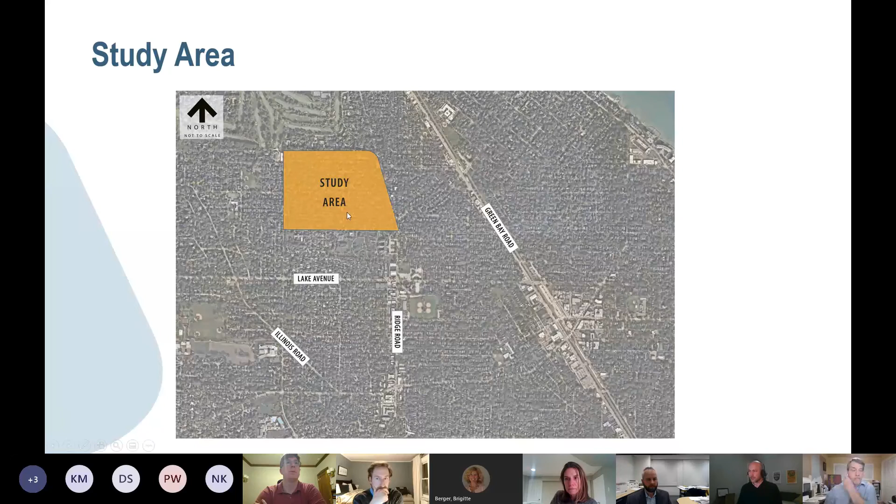Good evening, everyone. So first, the study area. This is kind of the broader look down from the village standpoint. You can see where the study area is, in the general quadrant north of Lake Avenue and west of Ridge. And as we get a little bit closer, the east-west streets highlighted in blue are the street segments that we focused on. Ridge Road on the east, Hunter Avenue on the west, and then Beechwood, Kenilworth, Chestnut, Thornwood, Greenwood, and Elmwood were the 6 streets, with 21st Avenue there in the middle, kind of dividing it in half.

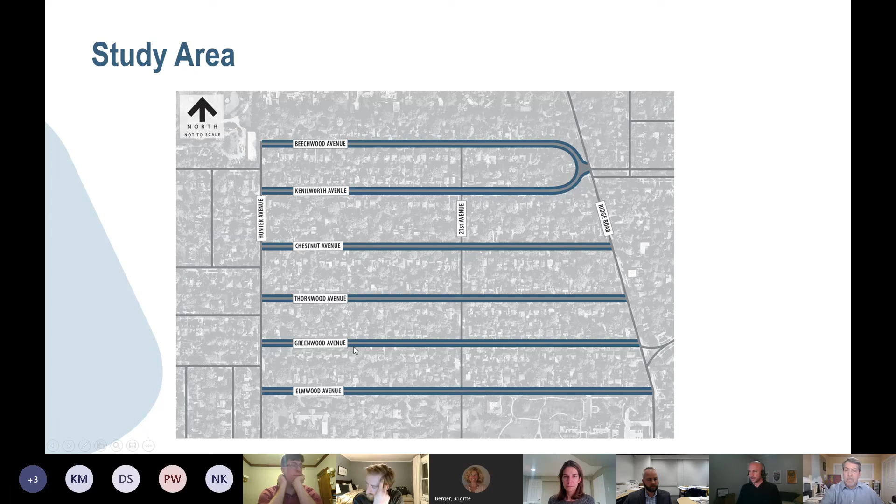So let me first highlight the traffic calming policy of the village. There's 4 criteria, and this is a data-driven criteria established by the village some years ago to put together some thresholds for identifying when streets might be considered for traffic calming mitigation measures. It's not necessarily intended to be: if you meet this criteria, you should have traffic calming. It's sort of an initial screening process. It's not a mandate, similar to a traffic signal or stop sign where you meet certain volume thresholds. You're not necessarily mandated, but at that point you should be starting to consider whether traffic calming measures are appropriate to address issues that may be present.

So the first one is a volume threshold, looking at 1,200 vehicles per day on a local street. The second one looks at the 85th percentile speeds being 7 miles over the posted speed limit. The 85th percentile basically represents a large majority of traffic speeds on the street, not necessarily the occasional person that might drive really fast down the street once in a while, but the large majority of traffic that you typically would see on the street.

Letter C is an excessive accident experience in a pattern that might relate to unreasonable speeds or volumes. And then D is facts or circumstances that may not be captured in these criteria, but might have contributing factors that warrant some consideration by the commission if A, B, and C are not really appropriate or tied to those reasons.

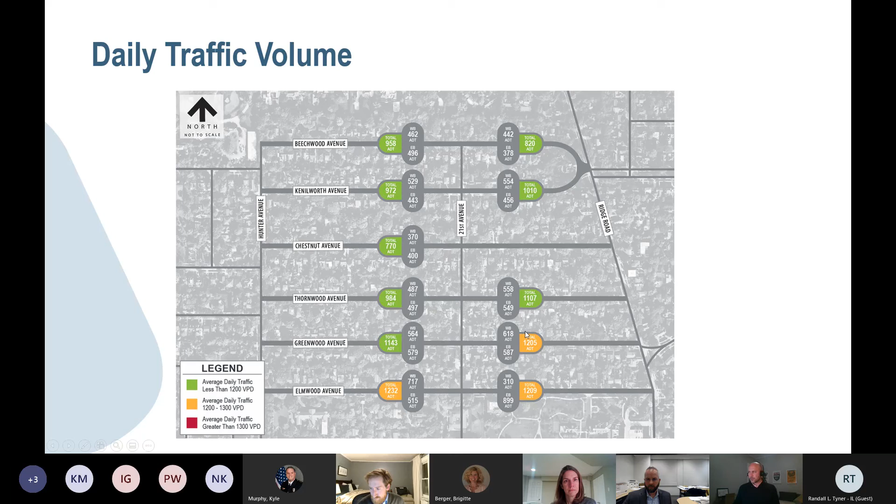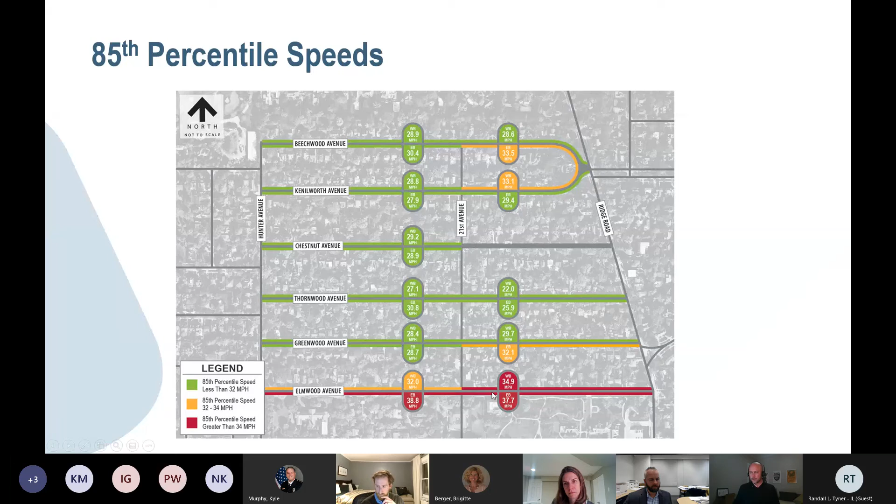So traffic calming measures. So the village also has some criteria for selecting measures, and I've outlined these here. The degree to which the problem is solved, we want to make sure that we're addressing the actual problem at hand, making sure that there's reasonable access for all. So that's making sure that we're still serving emergency vehicles, service vehicles, access to private property and driveways.

The safety implications of the action, making sure that whatever we're doing is still safe and maybe has other safety benefits. And then the last one, which I think is important, is looking at the extent of spillover problems. Basically, we don't want to solve one problem and then create other problems. So we want to make sure that we're thinking about those different characteristics as we're looking at potential measures.

So in terms of the context and the process, this is a general outline of our process and the evaluation. The first was we developed a sort of traffic calming toolbox, a matrix that looks at a range of different options, different scales, different levels of disruption, different levels of cost, and tried to then look at the benefits and the challenges and opportunities associated with each, and then put them in categories as to whether they were appropriate, whether they could be appropriate in certain circumstances, or whether they were just not appropriate for the context of the neighborhood.

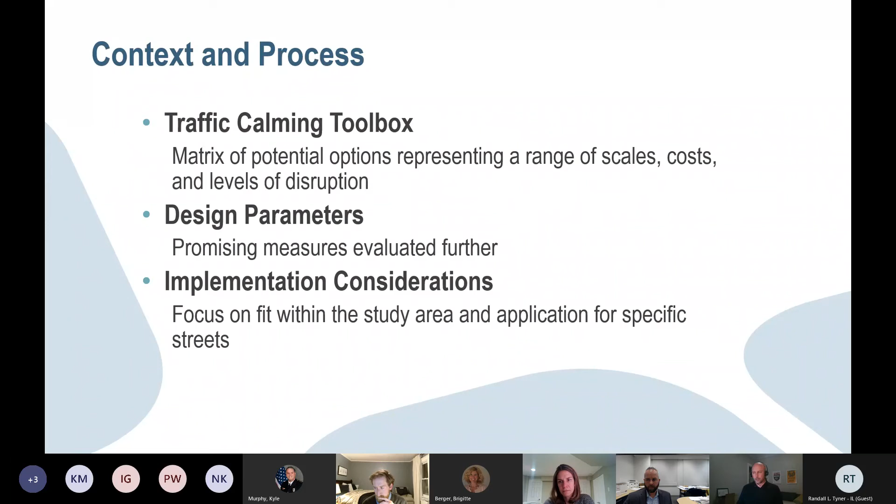And then we worked through those ones that we felt were appropriate or could potentially be appropriate and started to fit them specifically in the neighborhood and understand whether they were solving the problem, whether they were safe, whether they could potentially create other problems, and how disruptive they may or may not be and how effective they may or may not be. So I'm going to walk you through that process.

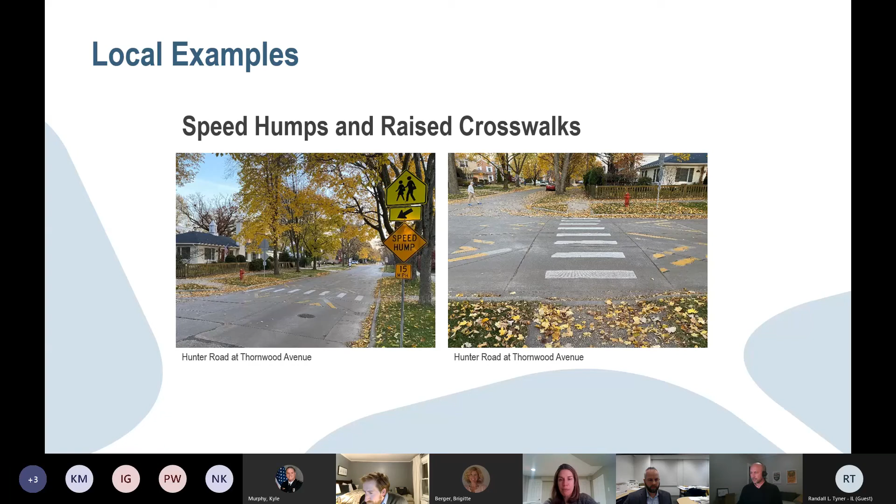But first, I want to show just a couple examples of some traffic calming devices that are in play in Wilmette today. So speed humps and raised crosswalks are a common one. These are some photos of the one at Hunter and Thornwood. It's on, I guess, the south leg of this intersection. It's a raised crosswalk. You can see the ramping up to and from the crosswalk.

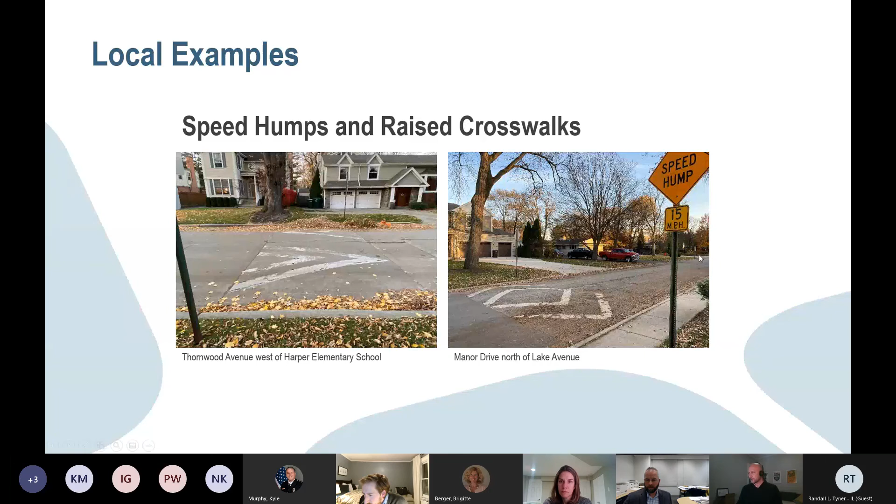The next couple, the one on the left is on Thornwood Avenue. There's I think a pair of them that are just west of Harper Elementary School. This other one on the right is one of 5 along Manor Drive, north of Lake Avenue, a block or two west of Loyola Academy. So there's a series of 5 along Manor Drive.

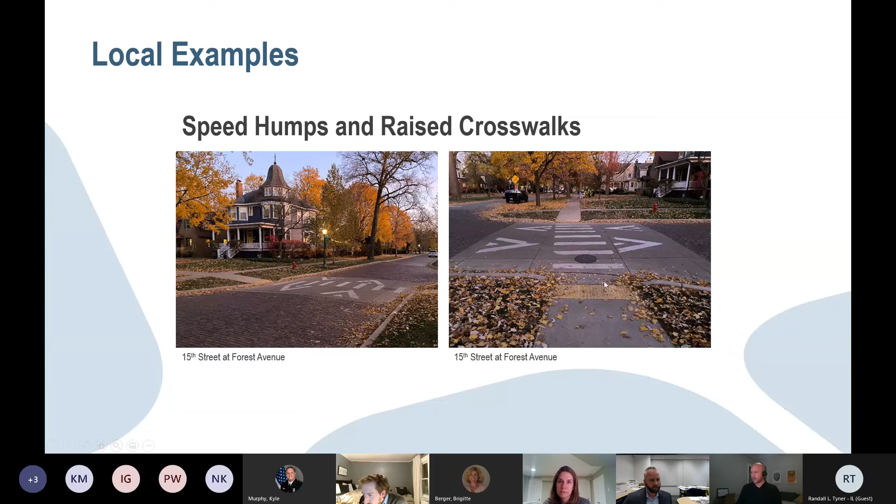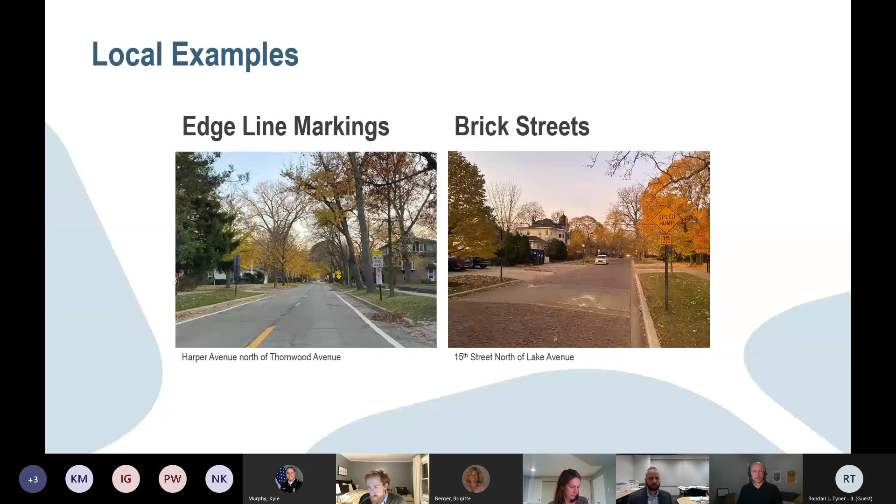And we were evaluating different options. So we looked at things like medians, chicanes, pinch points, and bump outs as being appropriate options. Speed humps, there's precedent in the community, obviously, for that, and they're effective at helping to address speed. Edge lines and other markings could be effective. Vehicle speed feedback signs, it's something that could be effective in some cases.

Bike lanes are something visually that help kind of reduce the effective width of the road and limit the area that vehicle traffic might travel in. Neighborhood traffic circles are another one that could potentially be effective.

Roadway surface treatments, one example would be a brick street that we just talked about, could be appropriate in some locations. And then some of these others are really maybe not appropriate in this location, dealing with some of the radii of the corners, shared streets, woonerfs or shared streets, raised intersections, cul-de-sacs, traffic diverters. Those can be pretty invasive in terms of really limiting access and circulation through a neighborhood.

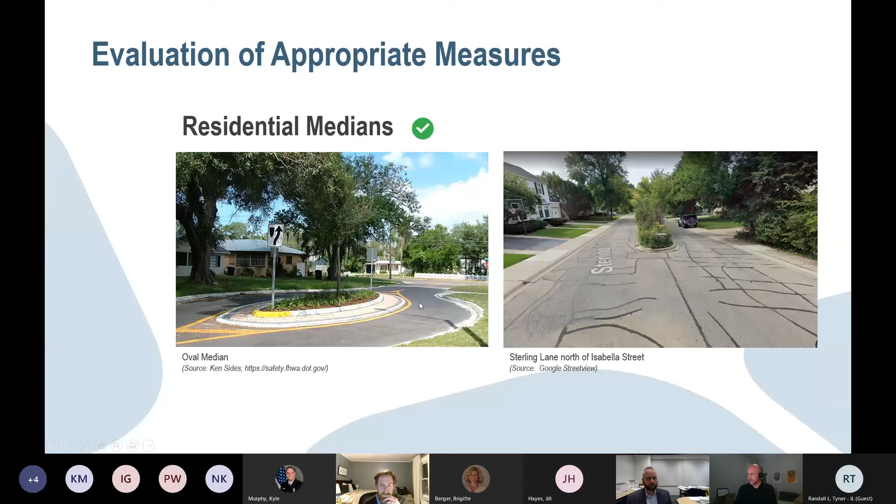The one on the right is actually in Wilmette. This is on Sterling, north of Isabella. So that's just east of Ridge, south of Wilmette Avenue. In that neighborhood, it's just like an L-shaped neighborhood, and you can see the median there kind of divides up the center line of the road.

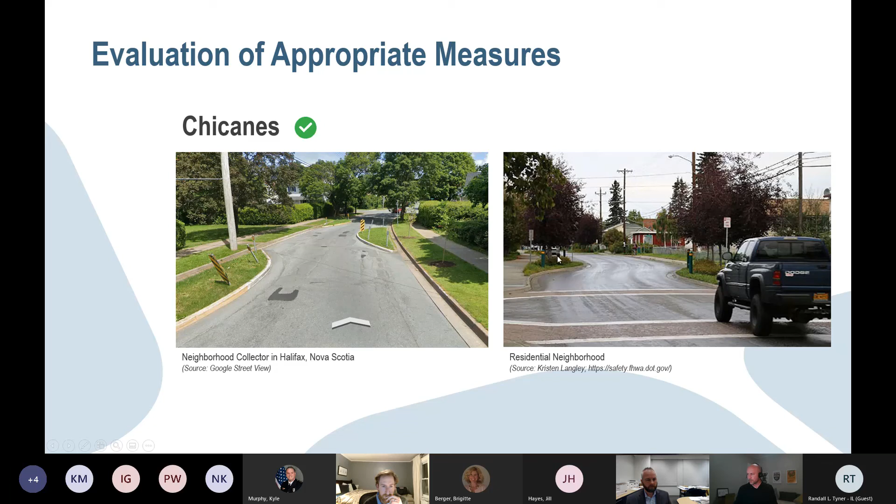Chicanes is another example that helps vehicles kind of have to maneuver around and moderate the speed. So you can see these examples in residential neighborhoods. The one on the left is physically separated from the curb so you can maintain drainage. The one on the right is more kind of built into the curb with the curb and stormwater draining around it. Just a couple ways to handle that.

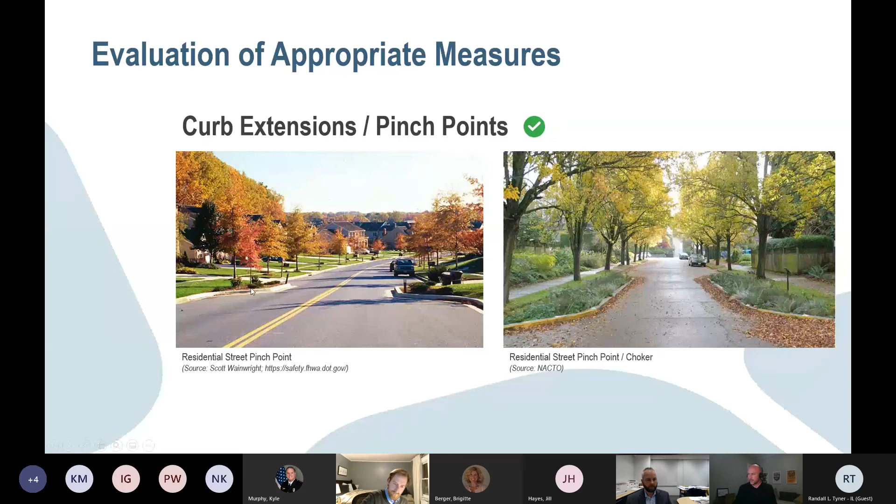Surface treatments have their place in the community. They're a little more passive, but they're also very expensive. And so we didn't feel that was probably the best use to try to pursue on these streets at this time. Vehicle speed feedback signs can be effective in at least informing people when they're driving too fast, which sometimes is the issue. They just maybe aren't aware.

However, in a neighborhood setting, a lot of times this isn't as effective because the drivers are regular drivers that drive the streets every day, and the effectiveness of vehicle speed feedback signs pretty quickly wanes and is no longer effective after a little bit of time.

Traffic circle is a very kind of acute situation, just focused at the intersection. Given the long east to west dimensions, we have, I think, roughly 2,500 feet from east to west between Hunter and Ridge, just a traffic circle would not have enough oomph for the value or bang for the buck at 21st Street to really effectively manage speeds up and down each of the streets that might be appropriate.

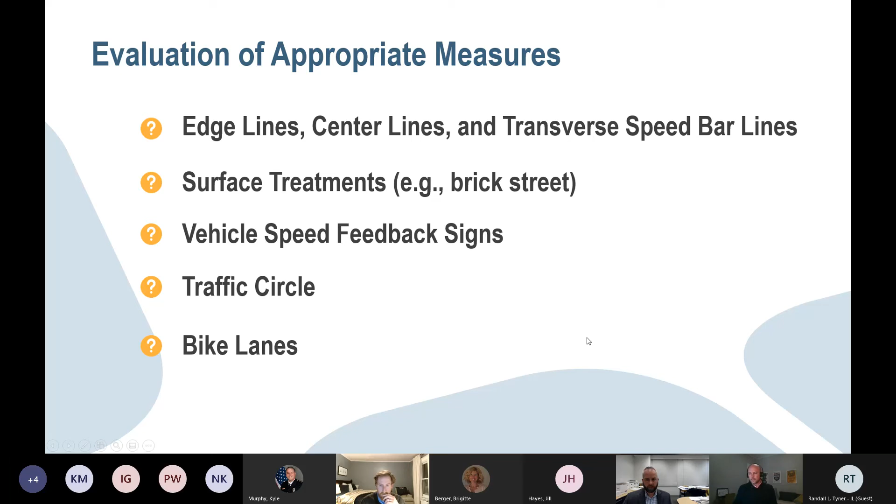And then last is bike lanes. Again, we don't really have the width for separate bike lanes. However, Elmwood is defined in the village's bike and, I forget the official title of it, bike and multimodal plan as a bike boulevard. So that is included in our recommendations for sharrows, markings and signs that indicate this as a shared street in terms of vehicles and bicycles. And we'll talk a little bit more about that.

So in the recommended plan, we focused on the idea of pinch points or bump outs versus speed humps as being the two most effective tools. Given the width of the street being about 25, 26 feet, if we were to do some bump outs or pinch points to moderate some of the traffic at certain points, we really don't have a lot of room to create those and still maintain two-way traffic at the same time. So we would have roughly 2 to 3 foot bump outs. So it's a lot of cost for not really getting a lot of really noticeable change in the curb line.

And given the precedence of speed humps in the community, the lower cost of speed humps versus bump outs, we lean towards the recommendation of using speed humps. And so the recommended plan, based on the speeds that we were seeing that I talked about earlier, was focused on Elmwood Avenue. So speed humps along Elmwood Avenue, 4 speed humps, 2 on either side of 21st. So 2 between Hunter and 21st and 2 between 21st and Ridge.

We wanted to try to divide up, each section is roughly 1,200 feet, give or take. So we wanted to try to divide these up evenly. So looking at 350 to 500 feet apart in terms of spacing. The Institute of Transportation Engineers has a good guideline for this. It's about 260 to 500 feet is the recommended range to space your speed humps to try to maintain 85th percentile speeds within the 25 to 30 mile per hour range. So we wanted to try to stay consistent with that spacing on each of the blocks.

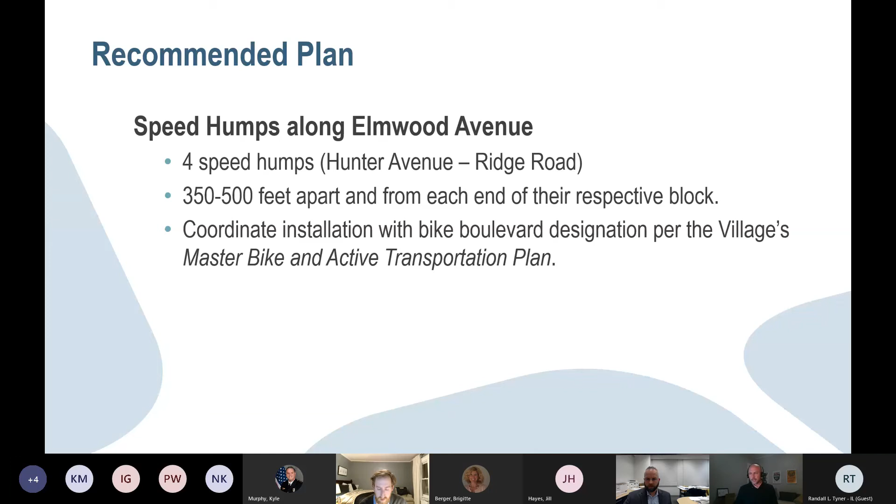And then we wanted to coordinate this with the bike boulevard designation for the village's recent master bike and active transportation plan. On the other streets within the study area, basically Greenwood going north, we want to monitor the traffic volumes and speeds after speed humps if they are to be installed on Elmwood. We want to monitor the speeds and volumes on those streets. We recommend a 3 to 6 month period afterwards so that traffic volumes and speeds and conditions kind of normalize.

But if you go back to some of the criteria that we highlighted earlier, one of them is to basically, we don't want to solve one problem and create multiple other problems. So we want to check to see, does traffic divert from Elmwood Avenue to any of the other streets? Does it put it over the threshold? If people are speeding and no longer speeding on Elmwood, but they start to use other alternates, we certainly don't want that. So I think we want to make sure that we're checking these other streets to make sure there aren't unintended consequences. And if there are, then we'll need to address those. And, if it is evident based on additional data collection, speed humps or potentially some other option might be appropriate for installation. So I'm almost done.

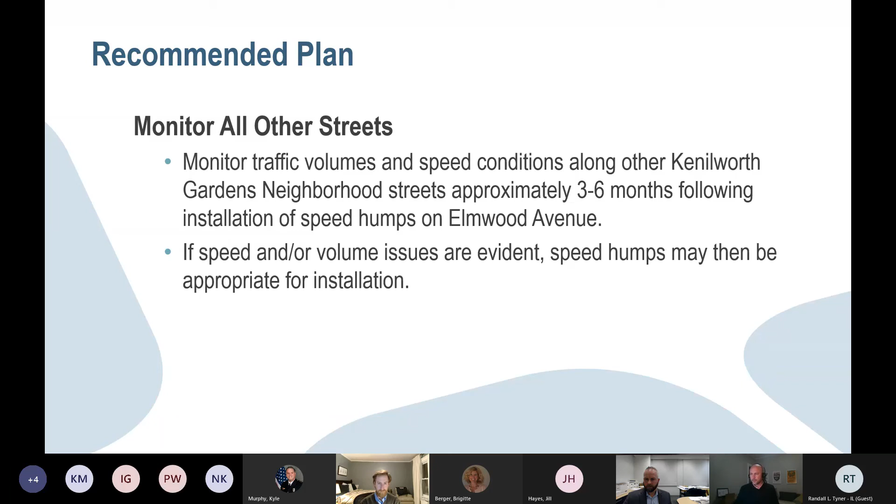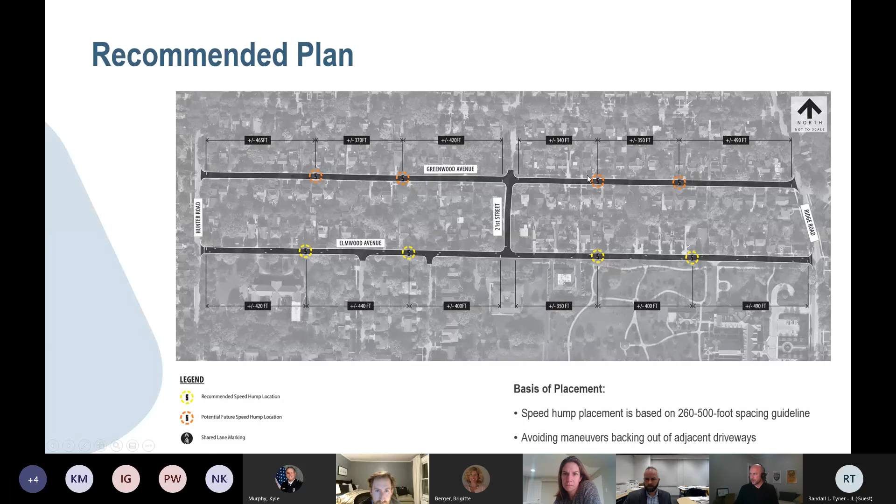The last couple slides, this is kind of a more zoomed in section you can see of Elmwood on the bottom. It's Hunter on the left and Ridge on the right. And then this is Greenwood on the top. So the yellow circles, and I realize the scale, this isn't great, and I'll zoom in a little bit more. The yellow circles represent the recommended locations for the speed humps, and the orange circles... We just looked at one block as an example of what you would want to do if it was evident that other streets needed some traffic calming devices, some suggested locations of where those could go, and the thought process behind it. And I'll zoom in just to kind of get into that.

So you can see this is going from Hunter, and then we'll move east towards Ridge. And I have a little note here on basis of placement. So I mentioned earlier the 260 to 500 foot guideline. I think we were able to divide these relatively equally and try to stay in roughly, I think we ended up between 350 and like 490 feet for our spacing, either between the adjacent intersection or an adjacent speed hump in each of these locations. We also looked at the driveways. I mentioned earlier that each of these streets, particularly the ones from Greenwood going north, are on both sides full of residential driveways, whereas on Elmwood, we don't have quite as many driveways on the south side. We have some larger properties, some institutional uses, the park, and so forth.

And so it's a little easier to place them in that location, but we did not want to place a speed hump obviously in line with the driveway, and we wanted to give ourselves a little bit of distance so that a vehicle could back out of the driveway without backing onto the speed hump. So these are suggested locations. I think that if this was to go forward, we want to make sure that they get verified to make sure that everything's in the right place. But we wanted to locate these roughly meeting the spacing guidelines and avoiding maneuvers to and from driveways. You can see we have spacing of about 400 to 420 feet on Elmwood between 21st and Hunter.

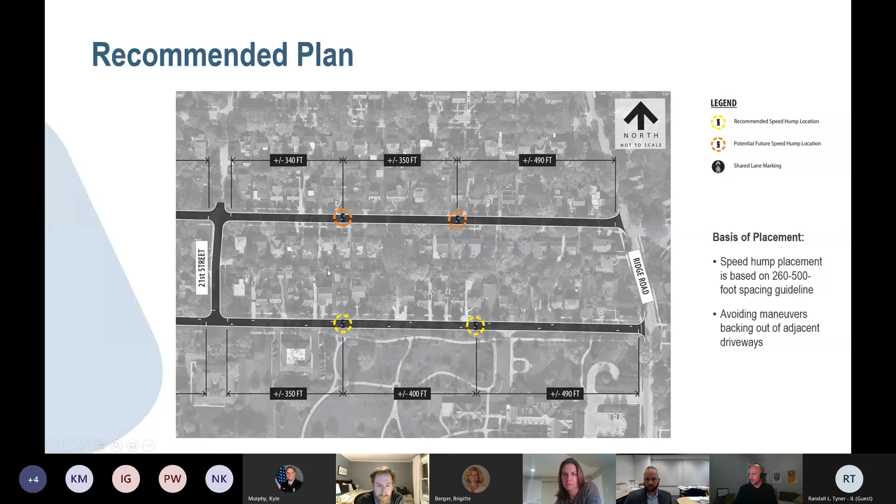With that, I know I kind of covered a lot of stuff, and I'm sure you guys have questions about other options or what we went through in the evaluation. I'm happy to try to answer any of those that you might have.

Thanks, Peter. Should I stop sharing? Is it worth pulling up for reference, or what do you guys prefer? I have it up on my computer as well, so I'd say you could stop sharing unless there's a specific question about it. Okay. I'll do that. Yeah, I can always pull it back up. Yeah.

So thank you. That was very informative. I first would like to open it up for questions and discussions by the commissioners. Does anyone have comments or questions on it? I could start. First, I just want to say I appreciate both the public comment and the presentation. It's obviously great to have the public's input, and the presentation was very easy to follow, the way you laid it out and brought us through it. So thank you for that.

And the nature of the problem, I'm familiar with this area. My son actually used to attend the Ronald Knox, so I know that street very well. Sure. The biggest concern I have is the last point, where we're worrying about offsetting the problem. When I look at the numbers for Greenwood, we've got one that's over the volume. Sorry, I'm looking at my iPad with the presentation here. We've got one with speed, and another volume that's just under. It's 1143, so another day maybe it would have been over 1,200.